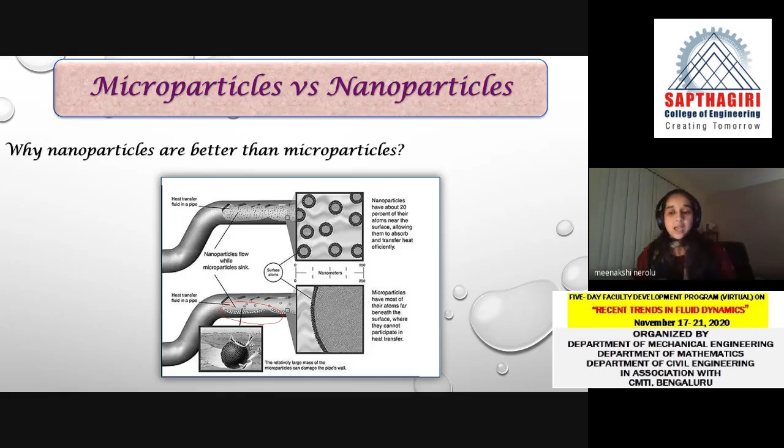As I told, we are going to use both liquid as well as nanoparticle. There are some common choices of base liquid or carrier liquid. In my problem, I have considered 4 liquids, categorized as inorganic and organic. Water is an inorganic solvent, and the organic solvents are ethylene glycol, engine oil, and glycerin. There are other base liquids like methanol, alcohol, silicone oil, kerosene, and so on. I'm mainly concentrating on water and these three organic solvents.

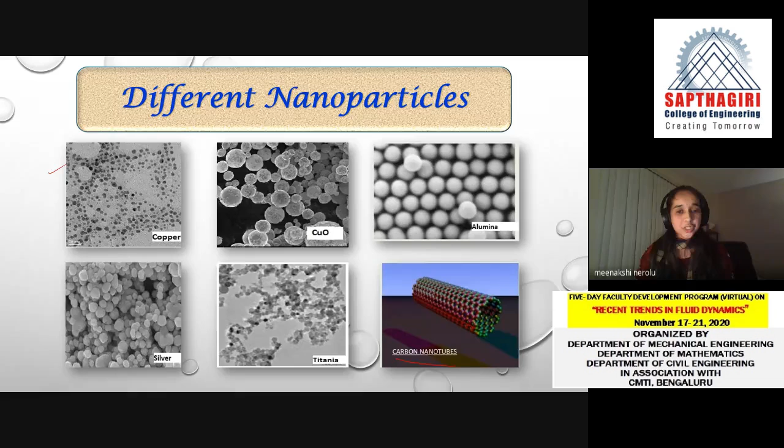Along with that, we considered 5 nanoparticles: copper and silver, which are metals, and copper oxide, aluminum oxide, and titanium oxide, which are metal oxides. There are other nanoparticles like gold, graphene, silica, iron, and you can also use carbon nanotubes to combine with the liquid. I'm not going to explain nanotubes. We considered only 5 nanoparticles and combined them with the different types of liquid, so a total of 20 combinations of nanoliquids are considered for this problem.

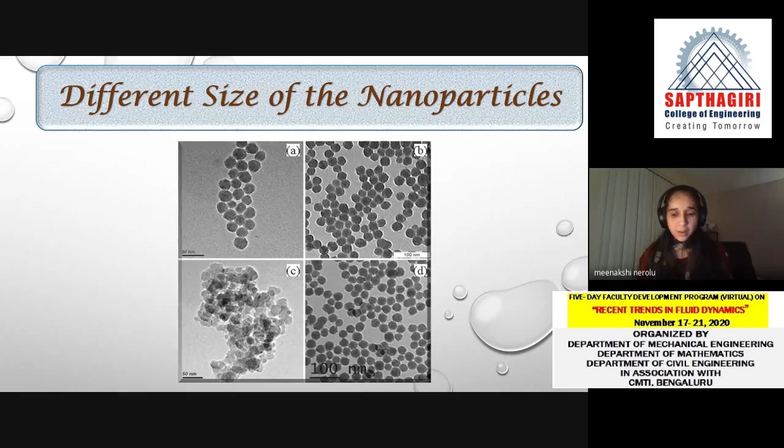Whenever you choose nanoparticles, we have to be very careful with the size. The size of the nanoparticle will usually be between 1 to 100 nanometers. This is the microscopic view of the nanoparticles that we have considered. The size of the nanoparticles matters, so we have to be very careful with it whenever we choose our model. As I told in the beginning, when we compare the nanoparticle with the microparticle, we see that they have high surface area.

Nanoparticles have high surface area so that they can increase the heat capacity of the liquid. So that is the main advantage of using nanoparticles. Now, whenever you change the size or shape or material or volume fraction of the nanoparticles, what happens? Absorption of thermal energy can be maximized. So these are all the important features of nanoparticles that we have to consider.

Now, along with that, the main idea behind the nanoliquid is thermal conductivity. We know that the thermal conductivity of nanoparticles is high compared to the liquid. So that is the key concept behind the enhancement of heat transfer. These are the main advantages of using nanoparticles, and if you combine them with a liquid, we'll get a nanoliquid. So this is the main idea of using nanoliquids.

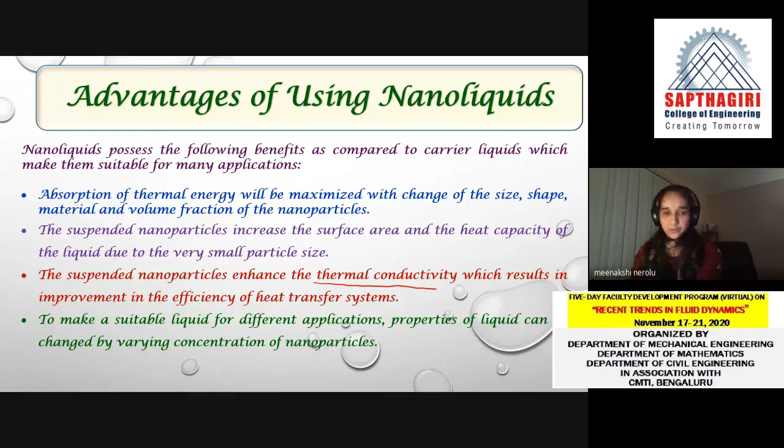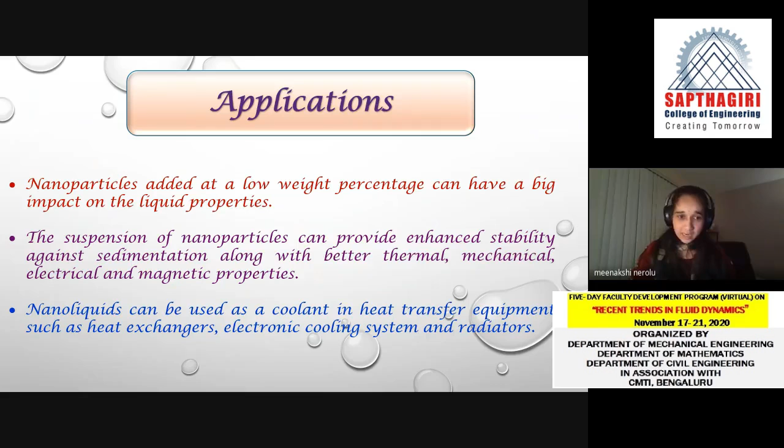Whenever we use nanoliquid, it can be used as coolant in heat transfer equipment, such as heat exchangers, electronic cooling systems, radiators and many other applications in real life. Now, with that in mind, with the application and usage of nanoliquid, we have to make some assumptions in order to do the mathematical modeling. Here we are going to consider small scale convective motion, because as theoreticians we have to make some assumptions; in this case we are not doing the experiment. The engineers and simulationists will do the experiment with some of the assumptions that we theoreticians make.

The assumption that we are going to consider in this particular problem is the shape of the nanoparticle. There are different kinds of shapes of nanoparticles. As I told, a carbon nanotube, for example, can be cylindrical. There are many other shapes, and that depends on the shape factor of the nanoparticle. But in this current problem, the assumption was the particle shape was spherical, and the size of the nanoparticle will be between 1 to 100 nanometers. And there will be uniform distribution of nanoparticles in the liquids.

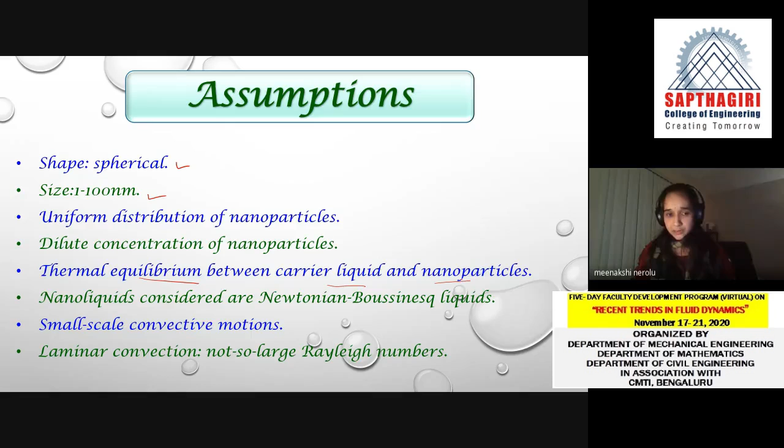This is another assumption. We are going to consider only dilute concentration of nanoparticles; I'll tell you why when I explain the mathematical modeling part. There will be thermal equilibrium between carrier liquid and nanoparticles. This is another assumption. And the nanoliquids considered are Newtonian Boussinesq liquids. Whenever I say Boussinesq, you are familiar with that; the density is constant throughout. And also we are considering small scale convective motion and laminar convection.

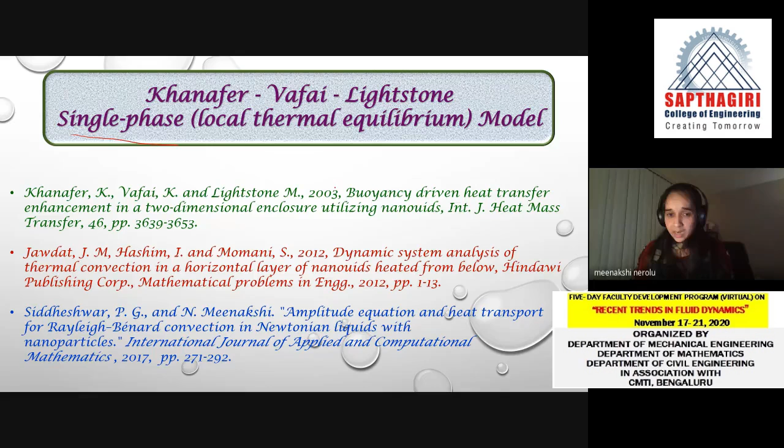With these assumptions, I'm going to explain different models that we consider whenever we study the Rayleigh-Bénard problem using nanoliquid. There are two models available. One is the single phase model, which is the local thermal equilibrium model; there is thermal equilibrium between liquid and nanoparticles. The other is the Buongiorno two-phase model, which is a local thermal non-equilibrium model, and the generalized Buongiorno two-phase model. In the two-phase model, there is thermal non-equilibrium between carrier liquid and nanoparticles. Due to this, there will be a seven-slip mechanism, of which Brownian motion and thermophoretic effect are dominant.

I hope these two-phase models were already discussed by Dr. Kanchana and Dr. Lakshmi in the previous lectures. In this talk, I'm mainly concentrating on the single phase model. That means there is a local thermal equilibrium between the particle and liquid. Along with that, this is not a usual Rayleigh-Bénard setup. We are going to use an external mechanism on the entire Rayleigh-Bénard system.

There are different kinds of regulatory mechanisms, classified as two types: internal and external. Internal can be a non-uniform basic temperature gradient, or heat source modulation or heat sink modulation. These are the internal effects on the Rayleigh-Bénard system. External regulatory mechanisms can be rotation, magnetic field, or gravity, temperature, and rotation modulation. These are the different kinds of regulatory mechanisms for Rayleigh-Bénard convection.

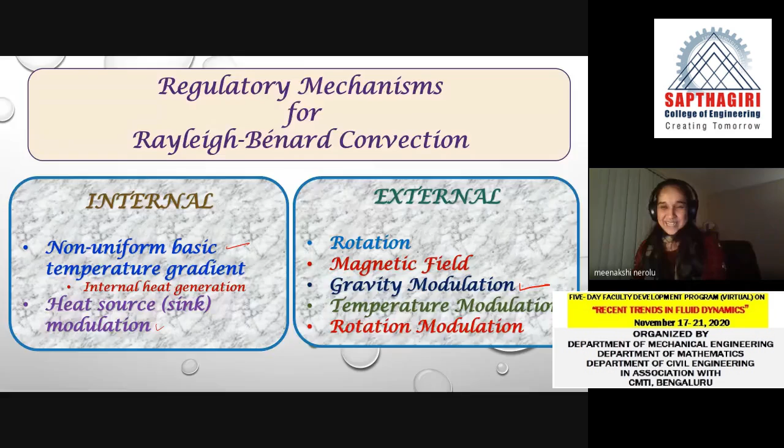I'm concentrating on gravity modulation. Again, there are a lot of models that we are going to use here. I'm going to consider three types of gravity modulation: sine wave, triangular wave, and square wave. More about these waves I'll explain in the mathematical modeling. So the three kinds of gravity modulation are trigonometric sine wave, symmetric triangular wave, and square wave.

So with all these assumptions and the models, we are going to formulate the mathematical equation. So it is very, very important to consider all the models and assumptions whenever we theoreticians formulate the mathematical equation for the given problem.

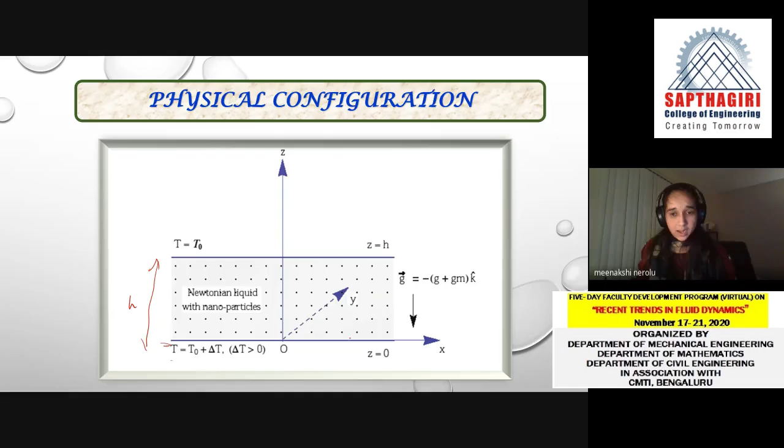Now, as I told, we are going to use a Rayleigh-Bénard setup in such a way that there are two horizontal plates, we are heating the bottom plate, and these plates will be at a distance h apart, and nanoparticles are uniformly distributed in the system. And as I told, I'm going to consider a vertical vibration whenever I say gravity modulation. So the system is vibrated vertically. So there is a vertical vibration in the entire system.

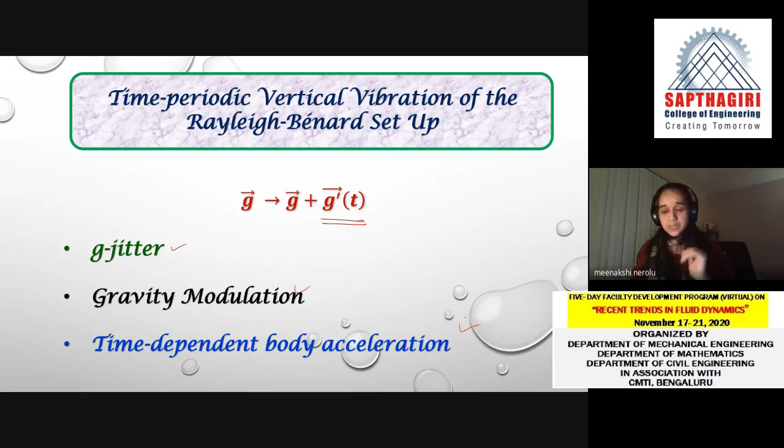Due to this, what happens? The gravity will be depending on time. So the gravity will be time dependent because of the vertical modulation. And we call that G-jitter or gravity modulation or time-dependent body acceleration. So there are synonyms. You can call it by any name. So this is the basic idea behind the gravity modulation. So you are going to put up the system vertically. So there is a vertical modulation in the system.

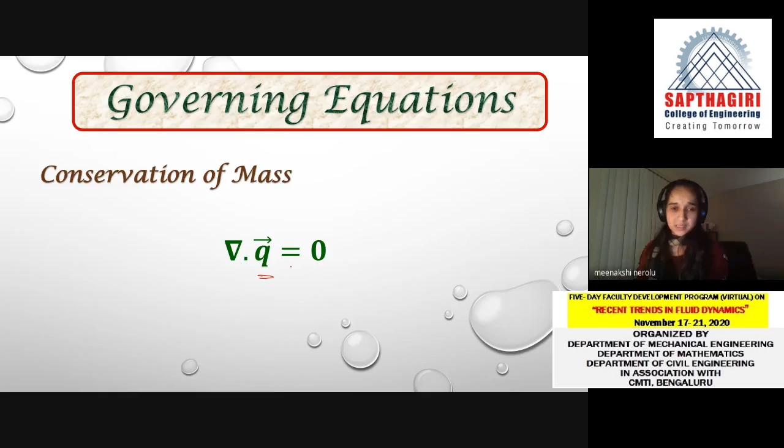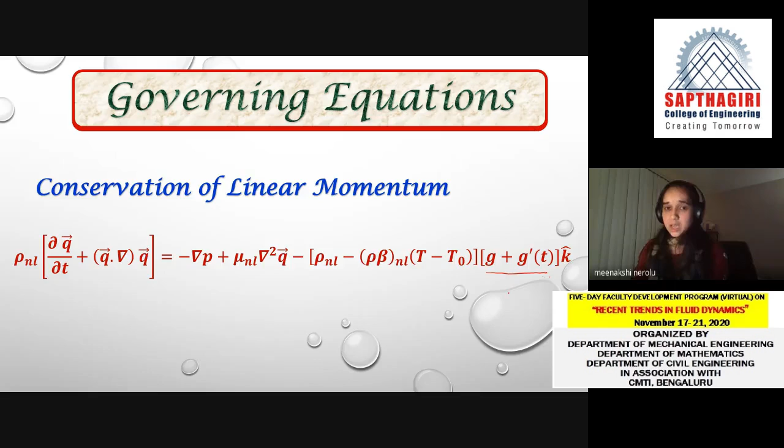Now, the governing equations of the entire problem are conservation of mass, where q represents velocity, and conservation of linear momentum. Now, here you have to make an observation: g is depending on time. So this is the key idea behind the entire problem. We are considering gravity modulation. And the conservation of energy. So these are the governing equations concerning the current problem.

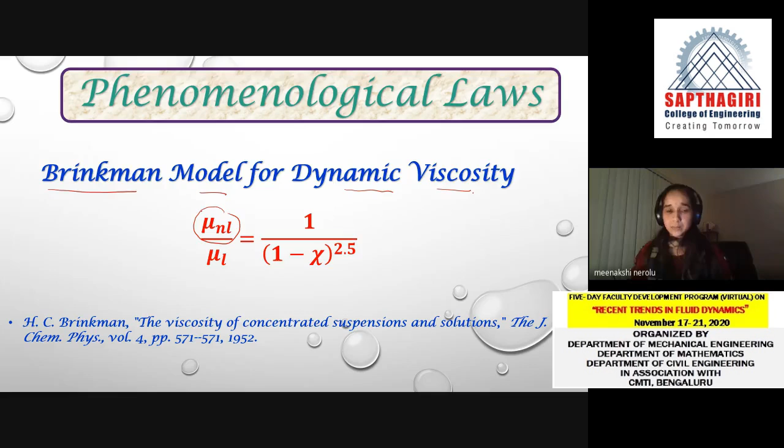Now, whenever I take the governing equations, all the physical properties chosen are nanoliquid properties. So whatever physical properties we have taken, they are of the nanoliquid, not a regular liquid. So whenever I have to find the dynamic viscosity of the nanoliquid, we have to use the Brinkman model. There are other models like the Einstein model and others. So I used the Brinkman model to calculate the dynamic viscosity of the nanoliquid using this formula.

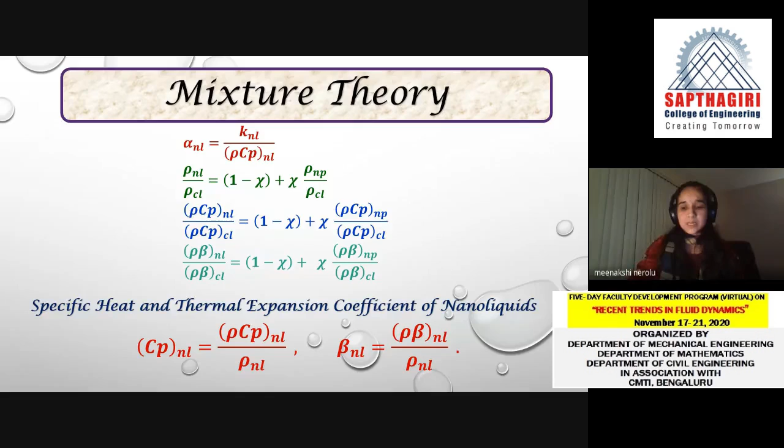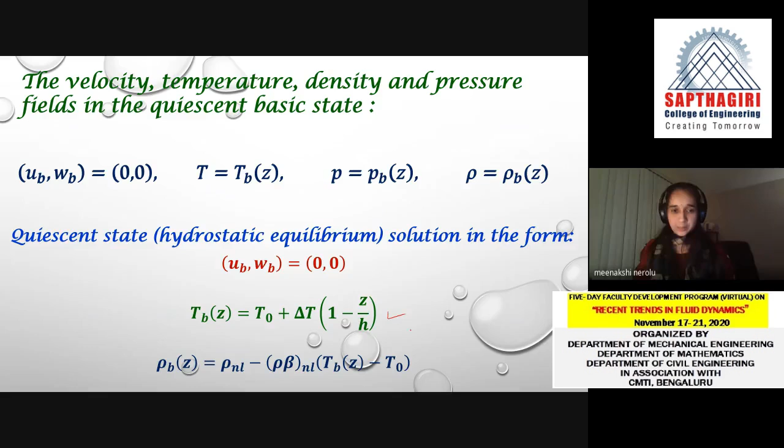Now, other properties of the nanoliquid are chosen from mixture theory. So these are the basic ideas behind the problem. So with that, we use a regular procedure. We have to use the quiescent state to get the solution for the temperature and density. And another common procedure we follow is that we consider the perturbation on the quiescent basic state, where prime denotes the perturbation.

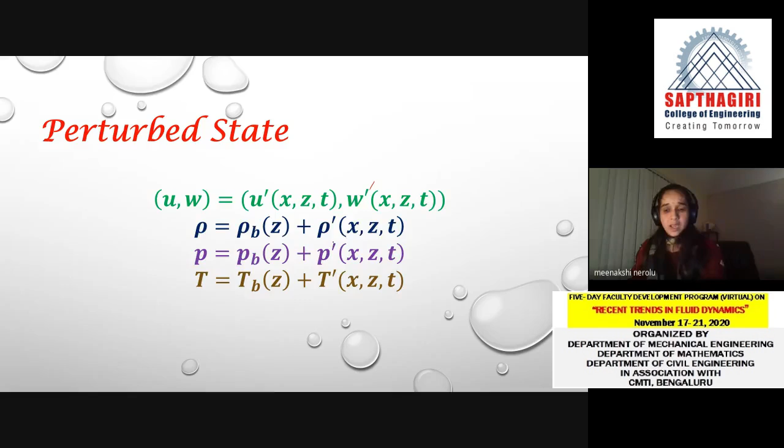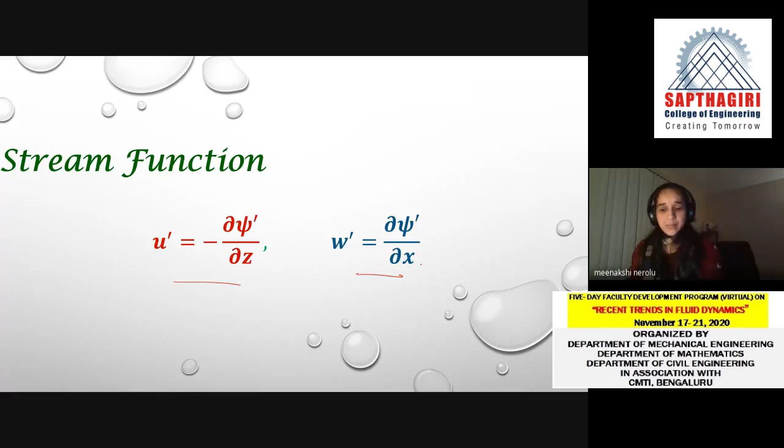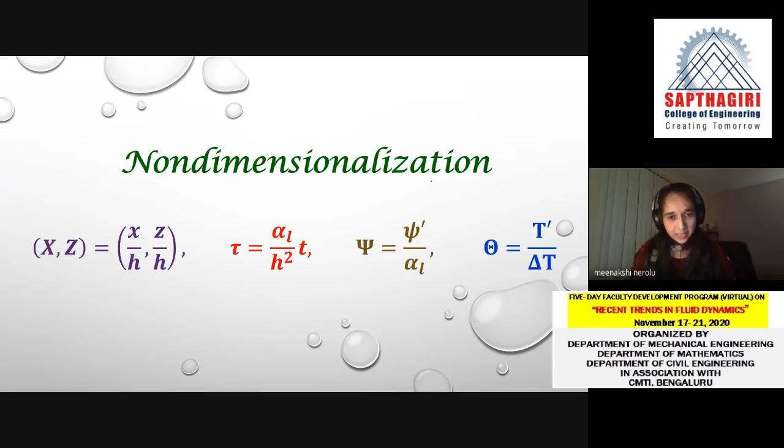Now, since we consider only two-dimensional disturbances, I introduce the stream function. It is given by u prime equal to this equation. So with that in mind, we have to eliminate pressure from the conservation of momentum, and using non-dimensionalization, what we get is the vorticity equation and heat transport equation. Now again, the main concentration is on g(τ). So it is gravity which is depending on time.

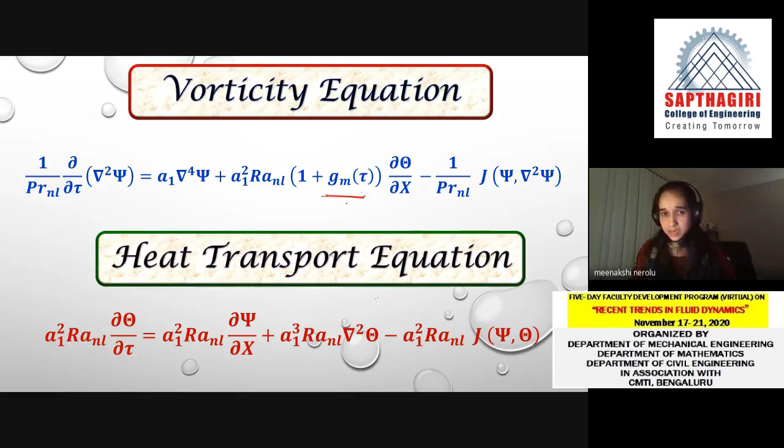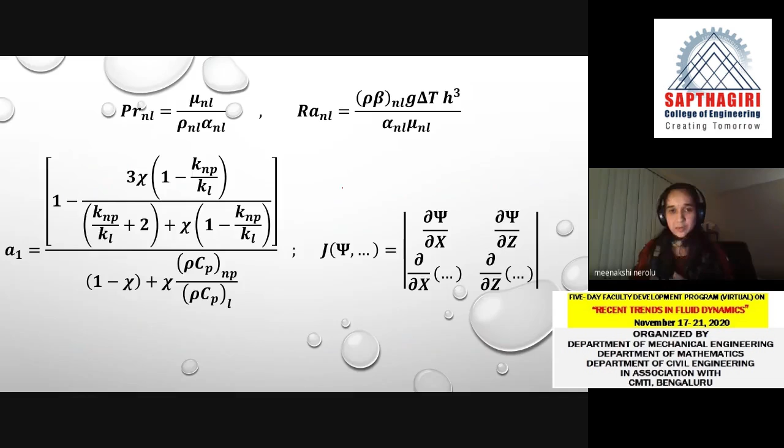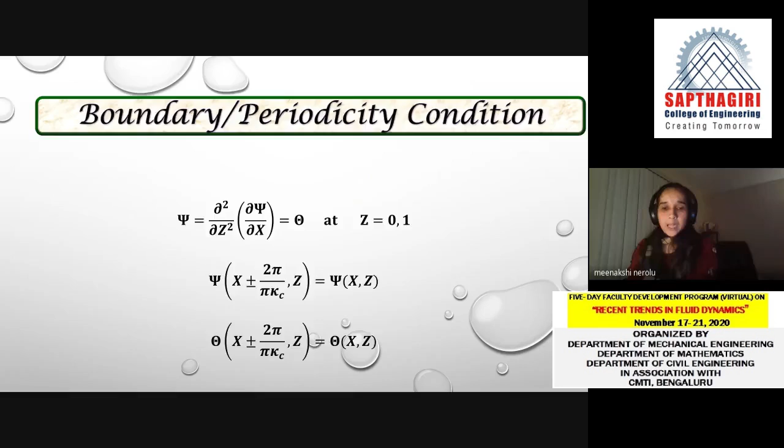Now, once we get the vorticity and heat transport equations, these are the nanoliquid parameters. Once we use the non-dimensionalization, we get all these parameters. We have to solve those equations by using boundary or periodicity conditions. Now, in order to solve the vorticity and heat transport equations, we use a perturbation method, and the asymptotic expansion considered for the Rayleigh number and psi and theta is given by this one. So that is the perturbation technique.

Here Ra0 is nothing but the critical Rayleigh number. Now, we have to be careful with the asymptotic expansion. Here, this is valid only for epsilon less than 1. So that means it is obvious that we are considering small-scale convective motion.

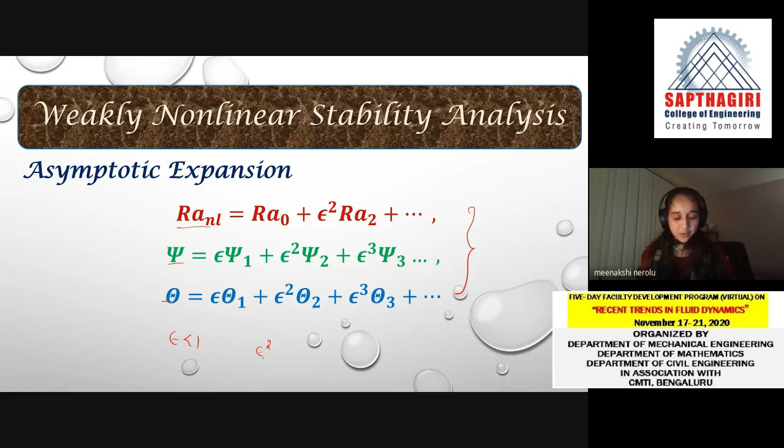So this is valid for epsilon less than 1. So epsilon square is nothing but the amplitude of convection. So once we have the asymptotic expansion, I'll write the vorticity and heat transport equations in the matrix differential operator form. So it will be easier to simplify the solution. So once we have the matrix differential operator,

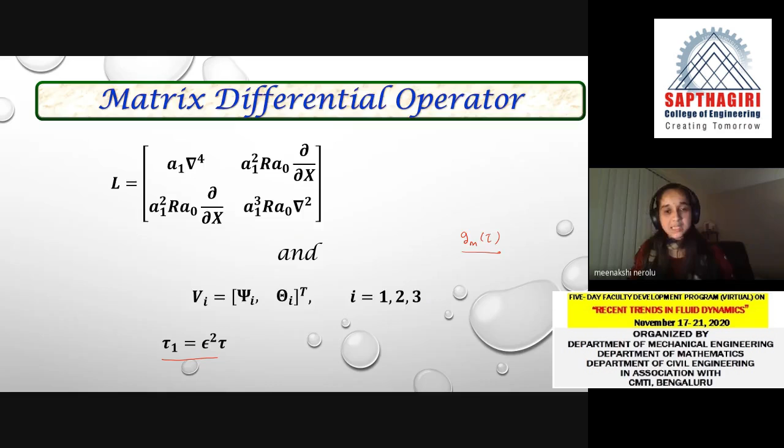again, here we can see that we are using the small scale convective motion. I introduce the small scale convection here, that is for time epsilon square tau. And also, in the equation we had gm of tau. That is for gravity modulation. As I told, there are three types of gravity modulation: trigonometric sine wave, triangular wave, and square wave. Now, for different waves, you have to consider different gm of tau. So it varies for different types of waves.

Now for sine wave, we have gm of tau defined as epsilon square delta 2 sine omega tau 1. So it will be in the form of a sine wave. Now whenever I say triangular wave, that is nothing but the Fourier expansion of an infinite series of sinusoidal waves. So here you have to be very careful. The number of harmonics will always be odd, and whenever you take n large enough, this sinusoidal wave will be converted to a triangular wave. So as n approaches infinity, this function will be reduced to a triangular wave.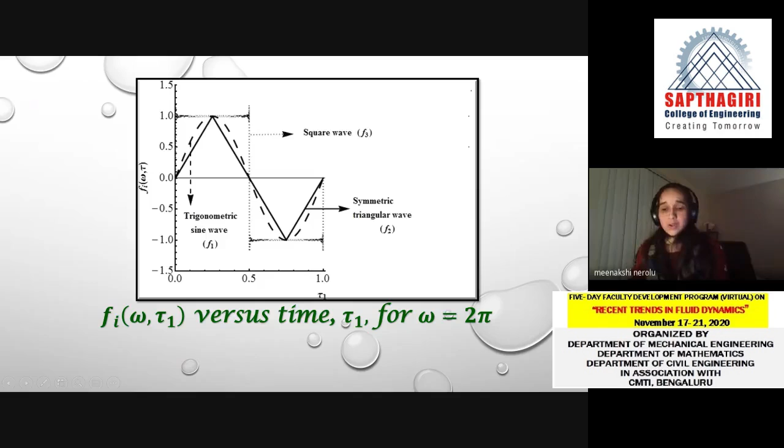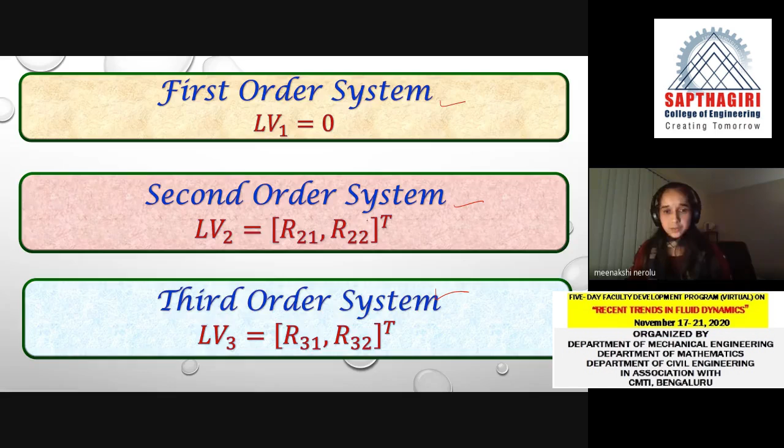So by considering all this information, we are going to solve the vorticity equation, substituting the asymptotic expansion and simplifying the vorticity and heat transport equations. You will get different orders of system, that is first order, second order, and third order system. So once you have these different order systems, you have to find the solution. In order to find the solution, I'm going to consider the boundary conditions again. Using these boundary conditions, we get the solution for the first order and second order system.

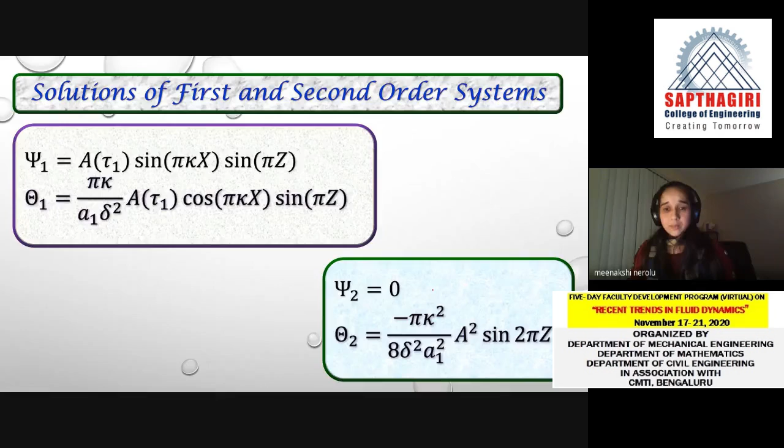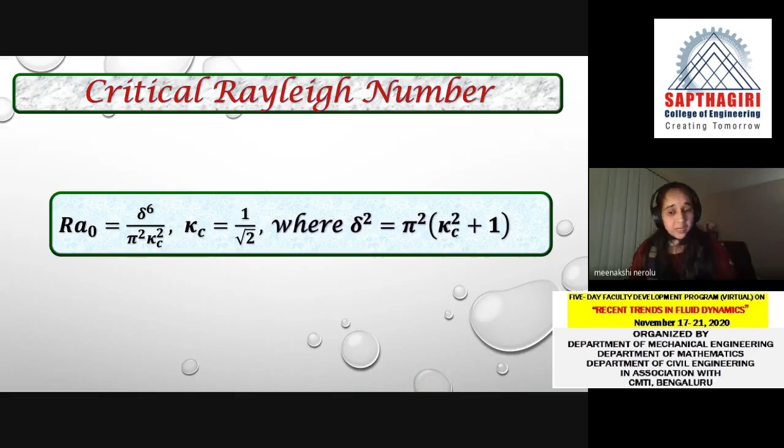Now, using the first order and second order system, we can find the critical Rayleigh number where the onset of convection sets in. I'm not interested in the third order system, but still we need to find the amplitude. To find the amplitude of the given problem, you have to consider the solvability condition. In order to formulate the solvability condition, we require the solution of the adjoint of the first order system. We know that the first order system is LV1 equal to 0.

So the solution of the adjoint of this first order system should be orthogonal to the inhomogeneous term in the third order system. In the third order system, we had R31, R32 transpose. So it should be orthogonal to the inhomogeneous part of the third order system. With that in mind, we get the solvability condition. It is given by this equation, in order to find the amplitude of the given problem.

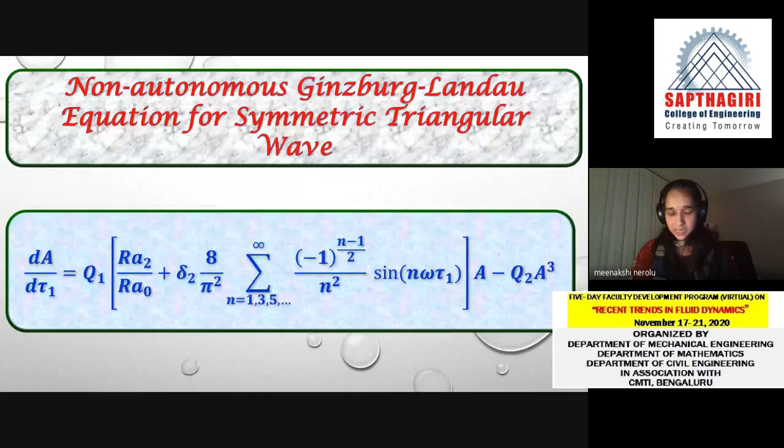So once you use the solvability condition, we get the corresponding first order differential equation that is well known as the Ginzburg-Landau equation, or we call this the Bernoulli equation. So whatever procedure I told till now, it is for sine wave. You follow the same procedure for triangular and square wave, and you will get the corresponding Bernoulli equation for triangular wave as well as square wave.

So once we have the amplitude equation or Bernoulli equation, this is not analytically tractable because it is time dependent. So to solve this, we have considered a numerical solution, and we used Mathematica NDSolve to solve the Bernoulli equation. Now, the main idea behind the problem is to verify the enhancement of heat transfer.

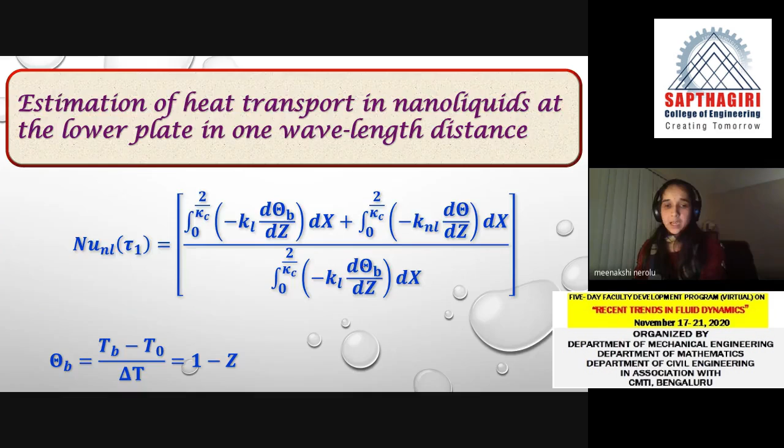With the value of this mean Nusselt number, you can tell whether there is enhancement of heat transfer or not. So this is the basic idea. So I'll come to the results and discussion.

Now, you have to calculate the mean Nusselt number for different nanoliquids. As I told, we have considered 20 nanoliquids, and we calculated mean Nusselt number for different waves, that is triangular wave, trigonometric wave, and square wave, and compared the result with without modulation. What happens to the Nusselt number with modulation and without modulation? Whenever I say WM, that is without modulation.

Out of the 3 gravity modulations that we have considered, square wave has the highest Nusselt number. That means it transfers the highest heat compared to triangular wave and trigonometric sine wave. Now, if you see the behavior of these 3 modulations, we can also note that the one which has the highest area under the curve will transfer maximum heat. In this case, the square wave has the highest area under the curve, so it will transfer maximum heat. The same result we get when we find the Nusselt number. So this is what we have got from our result.

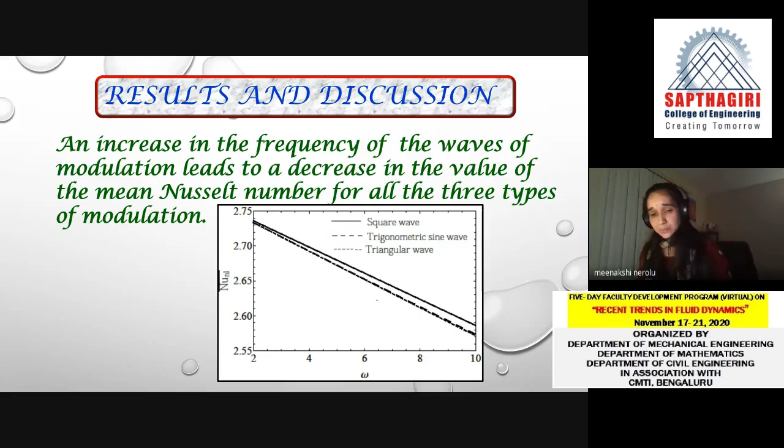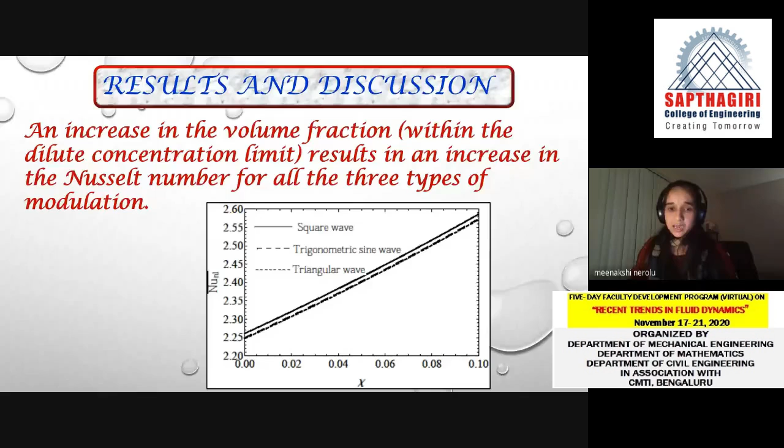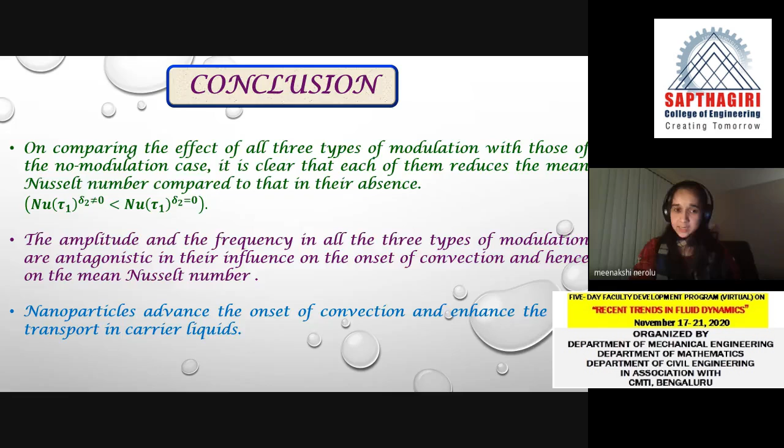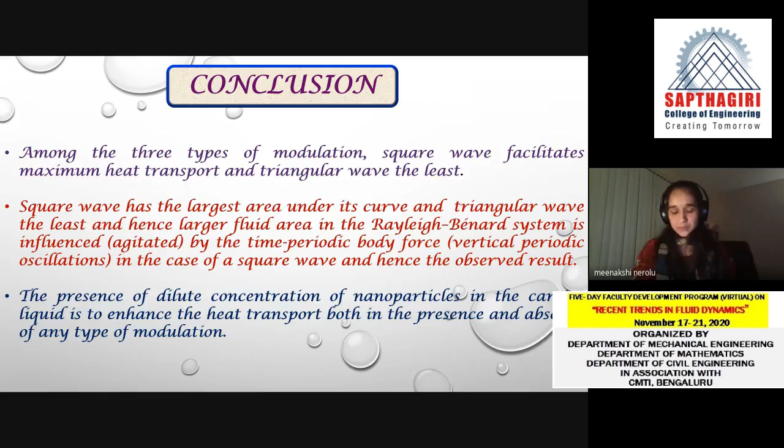So to come to the conclusion, whenever we consider 3 different types of modulation, the wave which has the highest area under the curve will transfer maximum heat compared to the others. The same thing we observed in the mean Nusselt number. And nanoparticles advance the onset of convection and enhance the heat transfer in carrier liquids. So the presence of dilute concentration of nanoparticles in the carrier liquid is to enhance the heat transfer. So this is the basic idea behind the problem.

Now, with all these models and ideas, the next research plan is to consider hybrid nanoliquids. Instead of one nanoparticle, we are going to consider two nanoparticles and see what happens to the enhancement of heat transfer. So with different models and methodologies, it will be used to identify which material is suitable for heat transfer enhancement or cooling. It is also important to note the cost of the material. Depending on the cost and enhancement of heat transfer, you can decide which material you have to choose.